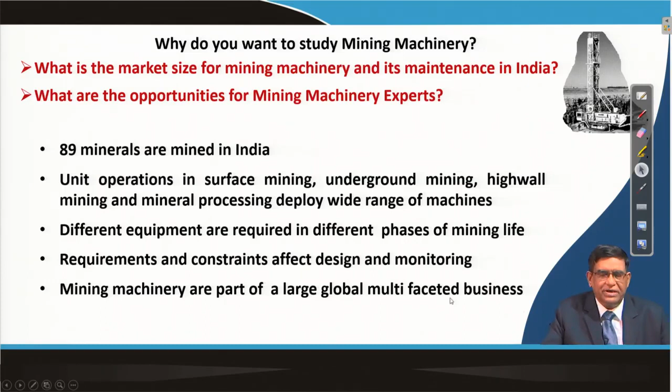So, these different machineries have been developed over the more than 200 years of mining history, and that is why mining machinery is a part of global business.

Though there will be a lot of wind power and solar power provisioning in India, dependence on thermal power will remain for some considerable years.

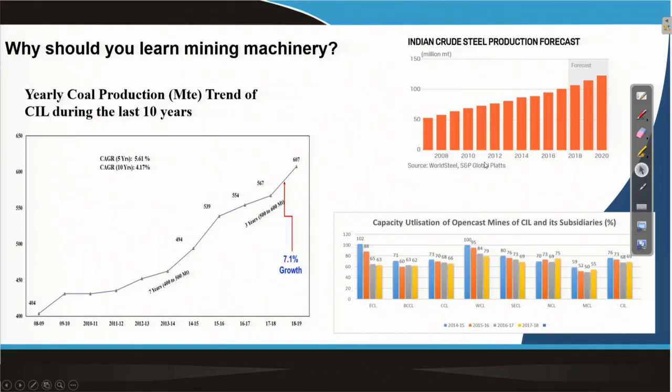So, there is a scope of deploying this machinery in a better way, and that is not only in coal. In steel also, there will be a lot of demand for iron ore, and India being a country with huge iron ore deposits, there will be a lot of mining machinery requirement.

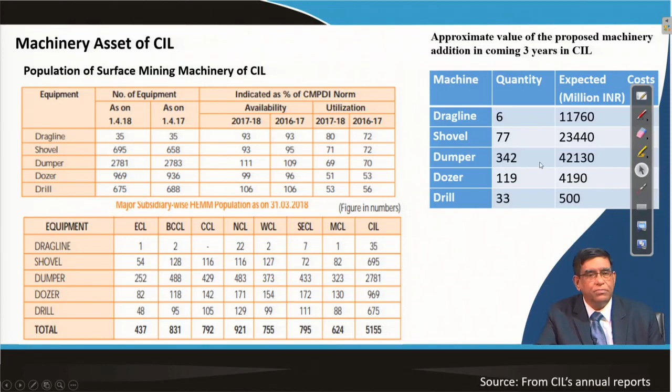If you see their number, it has increased over the years, and today there are more than 5,000 such machines, and you can see the type of investment in our country. Thousands of crores of rupees are being spent on mining machinery, and these machines' capacity utilization is also seen. Only in one subsidiary is there 79%.

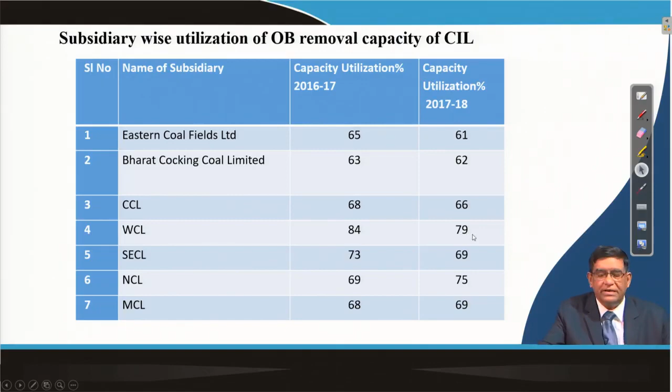That means what does it show? That means we will have to study mining machinery in a proper way, so that we can meet the gap. That is how our country can improve its productivity with safer and economic operations in the mines.

So, the whole mining machinery course will be giving you a lot of information about all this machinery, but after going through this particular class, introduction to mining machinery, you will be able to know the various types of mining machinery and classify them. Then you will know what machines are used for surface and subsurface operations, and you can draw the basic machine deployment chart, that is, for what operations how you will use machines.

Also you will be able to develop some broad selection criteria, that for which operation what type of machines will be selected, and also you will know what the characteristics of modern mining machinery are, if we want to study what changes are required in our existing machines. So, you will have to know the characteristics of machines and how the requirements will be specified.

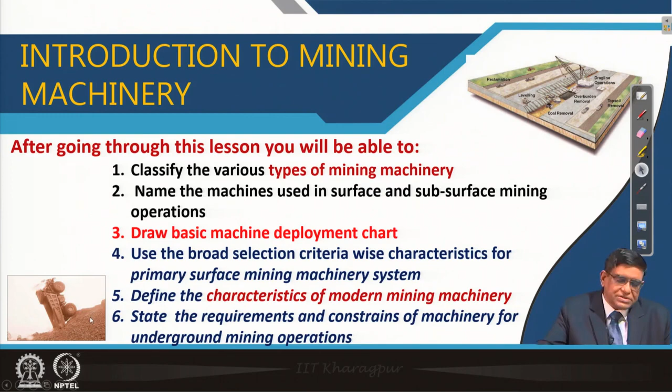So, this is surface mining, and while doing it, if you do not take safety into account, you can see in the other figure how a dumper can roll down while doing dumping operations. That means a lot of safety precautions will have to be followed. So, in this paper you will be learning about these things.

Now, coming to the classification of mining machinery, surface mining machinery and underground mining machinery are the two broad classifications. Surface mining means you are working under the sun, and underground mining means you are entering into the earth and then doing the mining operations. Besides these two operations, there is another one called highwall mining.

It is exactly underground mining from the surface, in the sense that after doing surface mining, when you reach the ultimate pit boundary, there are still some deposits, and those are excavated by a specific method called highwall mining. We will be studying later in this course what machines are used for highwall mining.

Then we get quarrying machinery. You know the stone quarries, the small quarries for taking roadstones and all; they are also mining operations. Smaller size machines are used there, those are quarrying machinery. And in every mine, other than the primary mining operations, there are some auxiliary operations related to construction work and civil work, so for that also you need a number of machines.

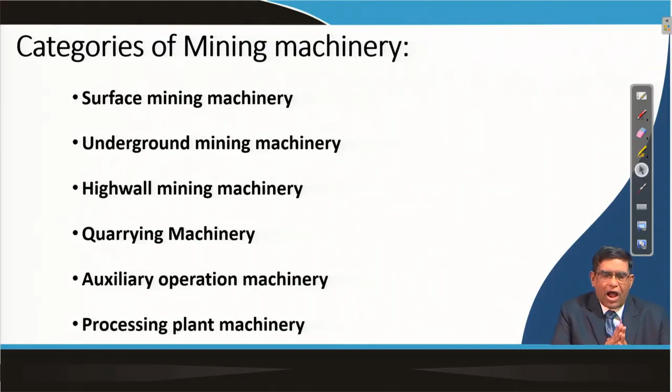So, there is a huge range of different types of machinery, but all machines are basically the same. You have got an operating unit, some functional unit, some power source, some control, and then you will have to operate these machines and maintain them so the machine is ready to work whenever you want. So, certain basic things are the same for all this machinery, but as a mining engineer you will have to know the specific purposes and how the machines will be selected.

Now, the operations in surface mining are done in different phases, and in each phase certain types of machines are needed. So, we have got the construction phase: you have found a deposit, you have got the lease from the government and permissions for mining, and then you need to start the mine. These locations may be in a forest or in a habitation area, so depending on that your construction phase jobs will be different.

Many of the operations involve clearing of the wood; if it is forest land, then you will have to do timber felling and stumping. You will have to develop a drainage network so that you can do your mining operations properly.

If there are some streams or rivers, you will have to divert them. Then topsoil excavation and storage. This is one of the very important environmental jobs, because the topsoil which is available there will have to be excavated separately and stored, because if the soil is lost once, you cannot get it again, because it takes millions of years to make a 1-inch layer of soil over the surface, because this is a process which takes place in geological time.

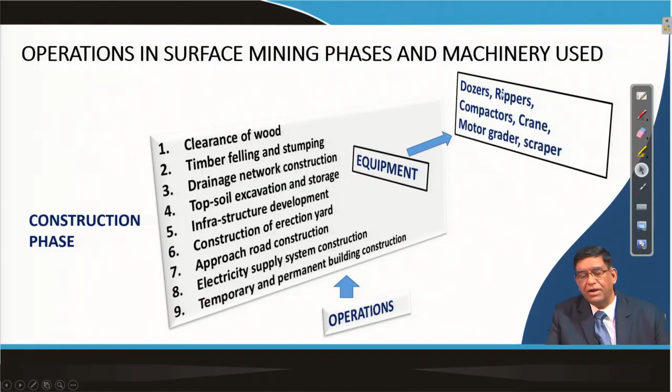So, all these things, from electricity supply system to your permanent and temporary building constructions, require certain machines, and those machines include your dozer, ripper, compactor, crane, motor grader, scrapers. We will be having a separate class for discussing all these machines and how they work.

Now, similarly, after construction has been done, you will have to do the preparation phase. In the preparation phase, basically you will have to remove the overburden. For removal of the overburden, you will have to do the drilling, blasting, excavation and loading. To remove the overburden hard rock, it depends. Sometimes it is a consolidated rock, sometimes it is semi-consolidated rock. They need to be fragmented so that they become loose to be excavated by an excavator. So, that is why you will have to use explosives to blast. Now, to put the explosives, you will have to drill the blast holes.

So, these operations of drilling, blasting, excavation and loading to a transporting machinery, and then that transport machinery will take it to the dump yard where it will be dumped, and then the dumped material will have to be leveled properly, so that proper housekeeping is done over those dump yards, and along with that you will have to make environmental protections. That is, if you are doing a hilltop mining area, then the whole water from there will be percolating down. So, you must see that proper rainwater harvesting facilities are created.

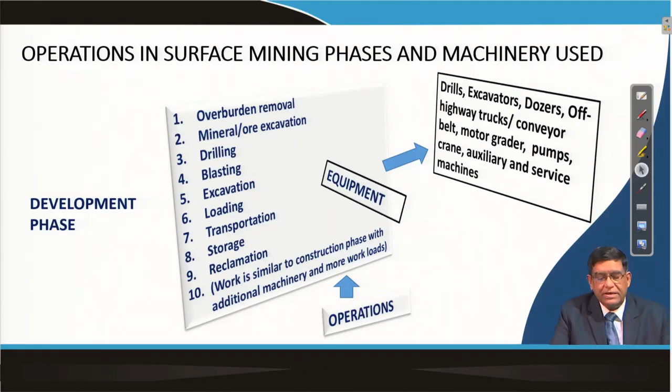Similarly, in the development phase also, the operations are similar. In that way, we are preparing the whole site so that the production for which the mine has been planned can be achieved. So, after the construction of the basic mine, you will be developing it, doing the same operations. So, you will be requiring the same set of machinery.

Then when your development is over, the mine is ready for producing the targeted output per year. That is called your exploitation phase or the main production phase. This word exploitation is very commonly used in the mining industry, but production is a better word. Exactly, we are producing, not exploiting nature, we are producing from nature, because we will again be taking care of nature. Earlier there were no proper environmental concerns, so people used to say exploitation, but the terminology is still valid.

But there also, in the development phase and the production phase, the equipment is the same, only the number of equipment will now be more, because now your mine is at full-fledged production. So, the production operations may be there at a number of places. So, a large fleet will be working. When the fleet size is more, you will have to take care of its maintenance, and see that there are no road accidents and all that.

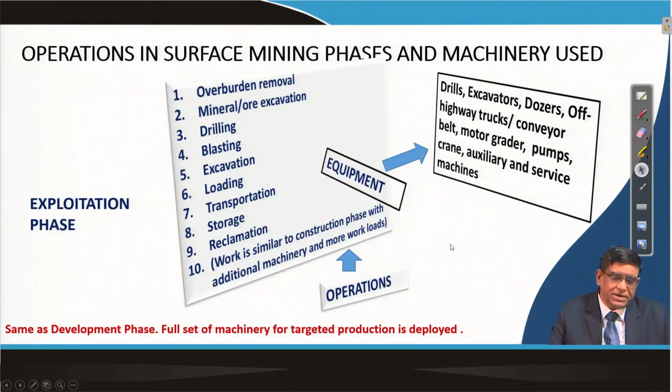That means at this phase your machinery will have to be managed properly. So mining machinery management in the mines is a main job in the production phase. Now, when the mine life is getting over, that is exactly when you say a mining operation ends. The preparation starts long before that, and then at some time the mining production will have to end. So this beginning and end, this is our mining life.

In this life, we have seen that initially there will not be production, then the production will start. After that there may be fluctuation, but then the production will come down, and sometimes there will not be any more production. But the mine life may go on because of your closing. Now, in this life cycle, when your production is closing down, at that time the reclamation phase starts.

When you started the mine, your deposit was lying over here. When you are excavating this deposit, this void is created, and a lot of overburden will be dumped over here. So you will have to fill it, plant trees, and then the nature will have to be returned. So in the mining reclamation phase, after the production is over, you will be preparing the site again. For that, a different type of equipment will be necessary.

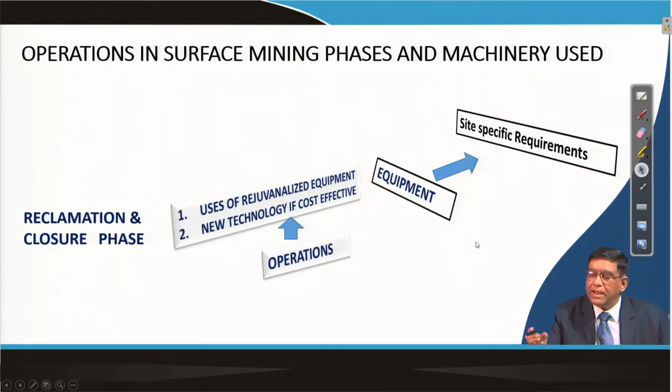Now, for drilling, you may have different types of drill rigs. We will be studying drilling machines separately, but you must know that there are different types of drills like percussive drill, rotary drill, top hammer drill, down-the-hole hammer drill. What are those machines used for, what are their purposes and how do they work? Similarly, for blasting, you will have to fill explosives into the hole, so for that you will have a mixer loader truck.

For the loading operations, different types of excavators may be used. For hauling, transporting the material, you can use a truck or conveyor belt. For crushing, you can use crushers; there are different types of crushers. For dust control in the mines, you may use a water sprinkler. So, as you are studying the other mining papers, you will have to find out what mining operations are done and what machineries are used in them.

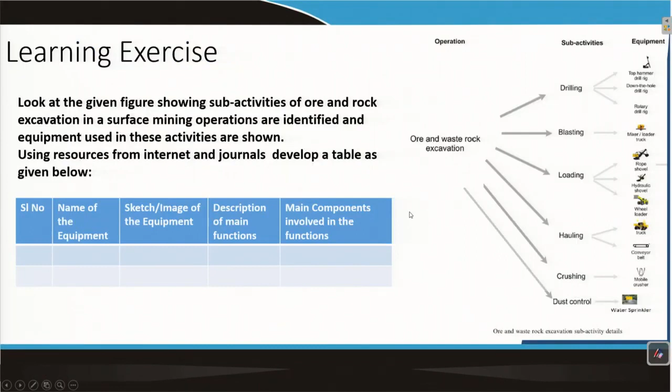After collecting this information, try to prepare a table like this: name of the equipment, draw some sketch or collect some figures for it, describe the main functions of that machine, and then the main components involved in that function. This is the way you will have to prepare a machinery deployment chart.

Your whole surface mining can be done in consolidated rock or unconsolidated rock. If you are working with consolidated rock, you will be mining with blasting, and in unconsolidated rock you can mine without blasting. To do the blasting, you will have drilling machines; there is quite a range of drilling machines that you will have to collect and study. Similarly, charging equipment will be used for the blast holes depending on the type of blasting you select.

Excavation and loading can be done by a single bucket excavator in cyclic operations, or in continuous operations with a multi bucket excavator. The single bucket excavator used with drilling and blasting may be a dragline type of machine, or it may be a shovel. The shovel can be an electric shovel or hydraulic shovel, depending on how it is powered, and there can be a wheel loader as a single bucket machine.

So, also these machines can give the material to a truck, and the truck will be taking it to the dispatch dump or destination, wherever it is to be. Now, this transportation job can be done by this truck, or it can be done by a conveyor belt system.

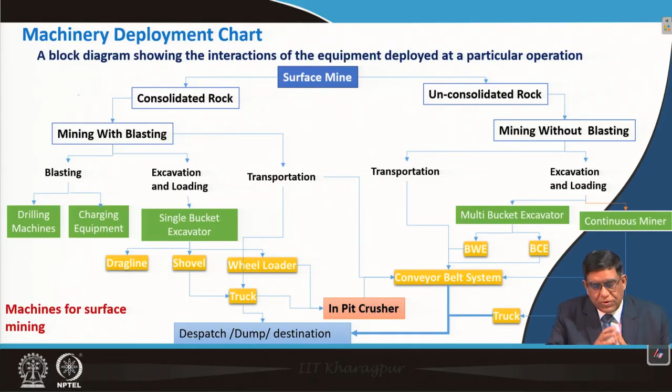This is a part. There are other new options and varieties. When we say it is a conveyor belt system, the conveyor belt itself has quite a range of different types. Those things we will be studying in this paper. So, that is why you will have to see how the machineries are deployed.

And as we said, there are different unit operations. Drilling and blasting is a unit operation of mining. Excavation and loading is a unit operation in mining, transportation is a unit operation in mining, and storage and dumping, that means the overburden or the unvaluable waste rocks will have to be dumped somewhere, and the valuable minerals like iron ore or coal will have to be stored, so that from there they can go to the end user.

So, different auxiliary equipment is also used as different operations are there. The machines required for these main unit operations will vary depending on how these operations are done. In surface mining, operations can be done in a cyclic, that is intermittent way, or semi-cyclic, or continuous. Continuous means the cutting and transporting operations are going on simultaneously without any time gap between them.

In cyclic, what is done? Drilling and blasting, wherever it is required, is never a continuous job. Drilling and blasting is a particular specific job. There you use the drills. A drill is the machine by which the drilling is done. So, similarly, excavation and loading and transportation can be done.

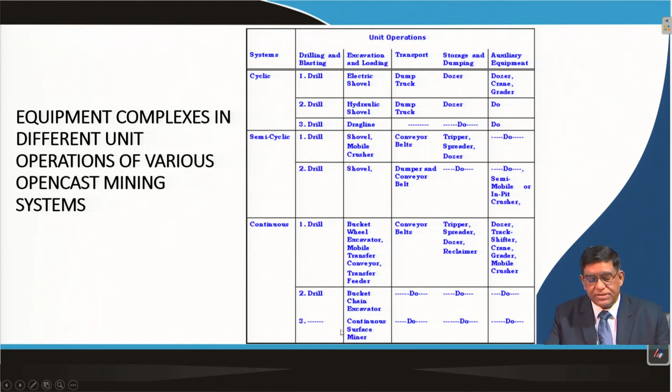So, here you can see the continuous mining is done by bucket wheel excavator, and there are other machines like mobile transfer conveyor and transfer feeder. Similarly, there could be bucket chain excavator and continuous surface miner; this machine is being used increasingly in our country.

So, for the broad selection criteria-wise characteristics of primary surface mining systems, the selection criteria are basically annual target, production rate, life of the mine, ultimate pit limit, deposit consolidation, associated site preparation, and system complexity. Now, if you use different machines, as I said, dragline, shovel, loader, bucket wheel excavator, you find that these types of tables are there, and you will have to collect and study them.

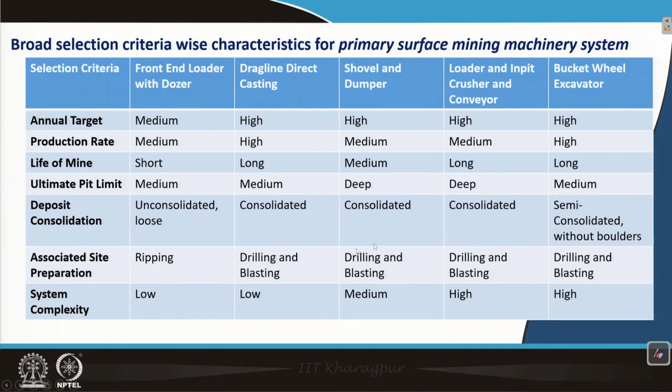Say if the ultimate pit limit is medium, then a front end loader can be used, but if it is for a deep pit, you will be using in-pit crusher and conveyor. Similarly, if the deposit is highly consolidated, you will have to use dragline or shovel dumper. So, depending on the criteria, you can select the machines.

For example, consider the capability of blending different grades of minerals. If the deposit has a variable grade, then a front end loader will give you a very good capacity to blend. You can mine wherever it is required and then mix to give good quality. But if you are using a bucket wheel excavator, selective mining cannot be done.

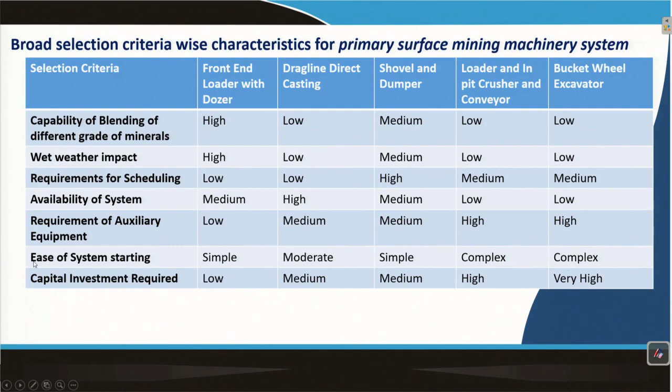Then there is the wet weather impact: front end loaders cannot work well in slushy and rainy seasons. Similarly, system availability: as you go to bucket wheel excavators and continuous systems, it is a complex system, so availability becomes low. Similarly, when there are more components and machines in the system, starting the system becomes complex.

So, the modern machines' characteristics are high installed power and modular design, that is, the machine comes in separate groups of units, and those groups are joined together, and if anything goes wrong, you take out that module and add another module. That is the way it can be done.

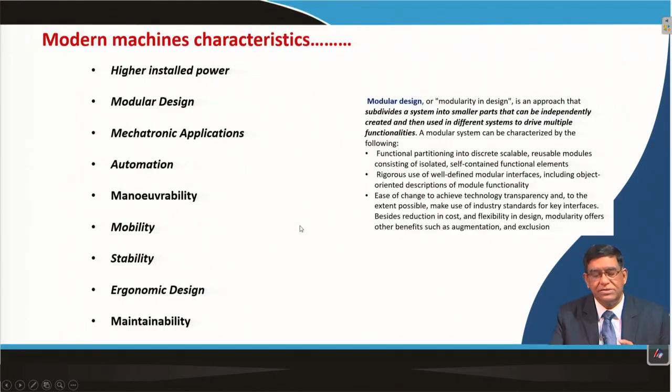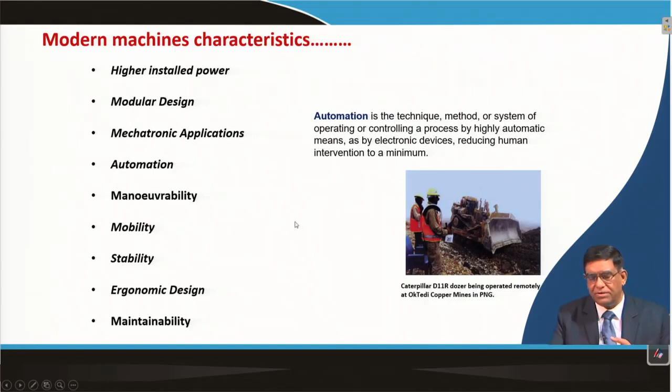And then mechatronic applications: new machines are coming with good sensors, and with that the whole control can be done. And there is automation, so many operations can be done without the operator nearby. Just like you can see here, a dozer is being operated remotely, a manless dozer. Nowadays you have automated trucks without a driver; you can see Rio Tinto has produced them. Then these machines must be maneuverable in short areas where there is difficulty.

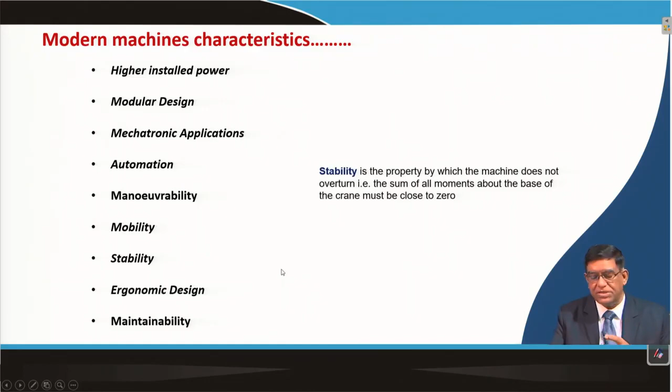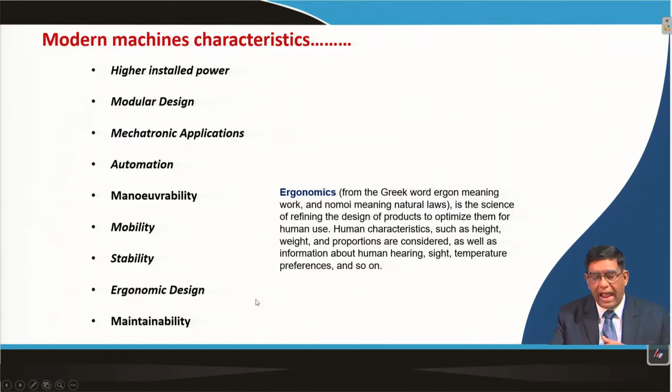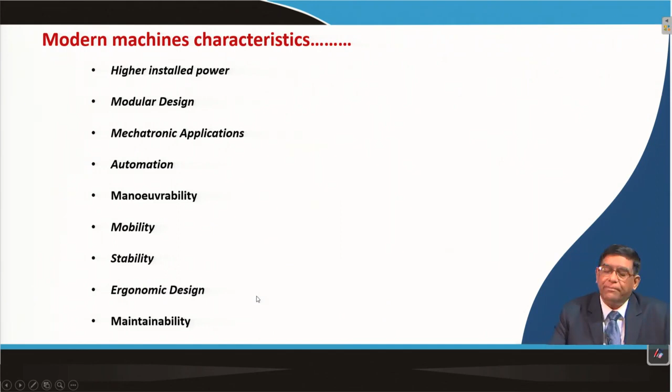Similarly, mobility of the machines, that is, the capacity to move within a defined degree of freedom. It will have to be stable, it should not get overturned, because it will be working in an undulated area. It should be ergonomic, comfortable for the operators, and the machine must be maintainable. That means if anything goes wrong, it should be brought back to normal operating conditions within a very short time.

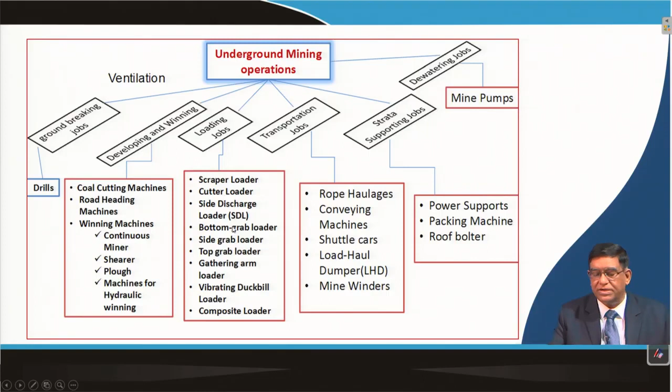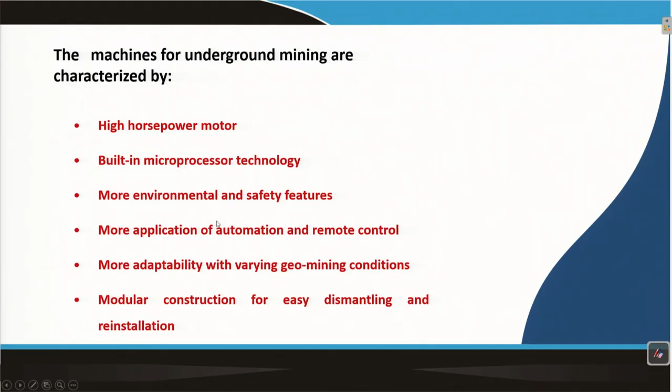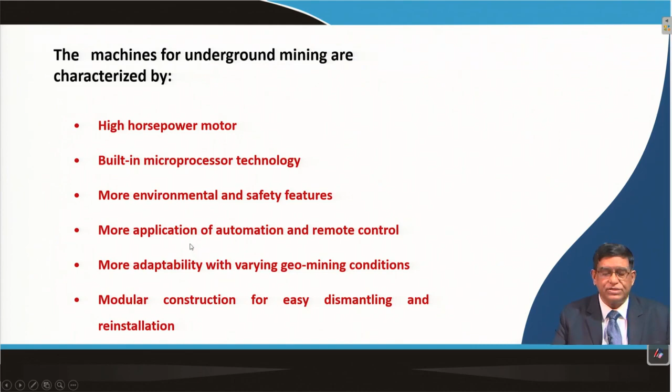Similarly, underground mining machineries are there for different operations like ground breaking, development and winning, loading, transportation, strata support, and dewatering, and for that a wide range of machineries are there. We will discuss underground mining machinery in our next class in detail. These machines will have to have high horsepower and work in a very robust manner. I will tell you how they work and their characteristics in our next class.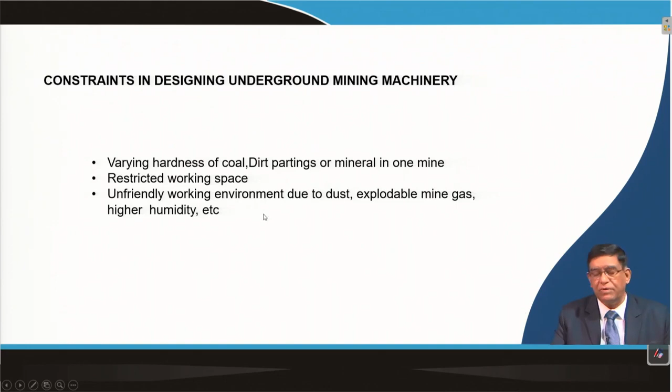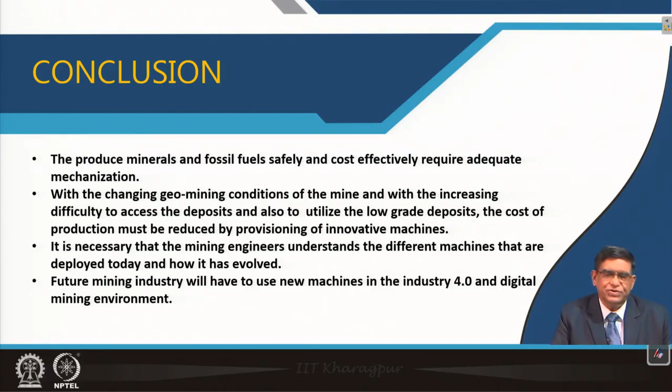So, they will have to fulfill a number of conditions, and these are some of the constraints in designing underground mining machinery, which have to be taken care of while studying mining machinery. To produce minerals and fossil fuels safely and cost effectively requires adequate mechanization, and with changing geo-mining conditions, increasing difficulty accessing deposits, and use of low grade deposits, the cost of production must be reduced by innovative machines. So there is huge scope for innovation, whether changing certain components or adding operational features.

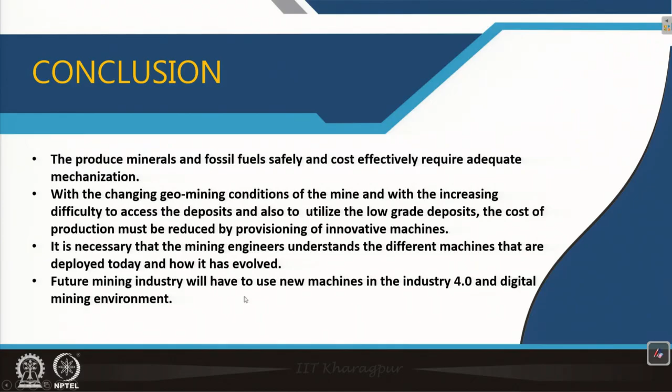So, it is necessary that mining engineers understand the different machines deployed today and how they have evolved. Their trend of development needs to be known, so that the future mining industry can use new machines in the Industry 4.0 and digital mining environment. How IoT is going to change things, how data analytics can help, how the machine parameters influencing performance are monitored, and what sensors will be put there so that overall control can be improved.

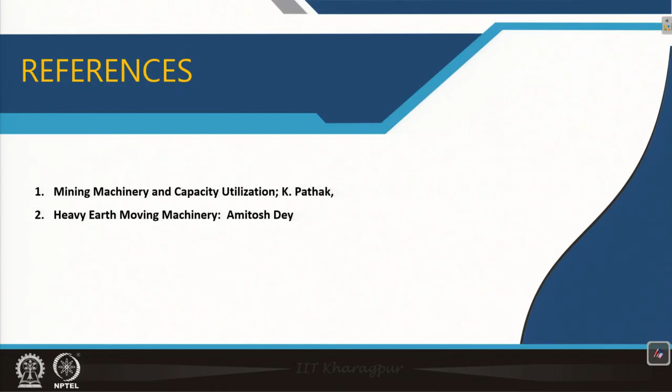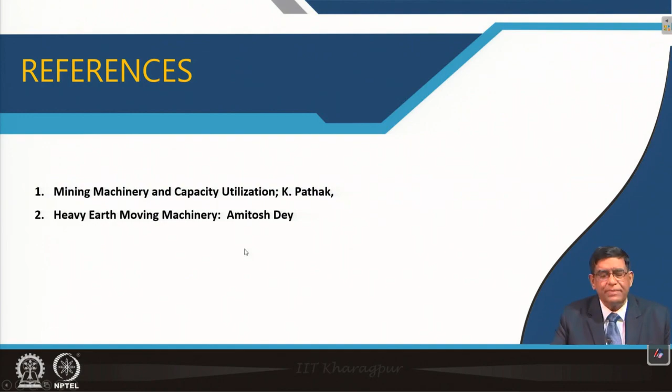So, you can study these books. There is Mining Machinery and Capacity Utilization, published by Cygnus. There is also a book called Heavy Earth Moving Machinery, published by Lovely Prakashan of Dhanbad, by Professor Amitosh, covering all the surface mining machinery, and other books like Moving the Earth by Nichols, which will also be very useful. But today you can get a lot of information about mining machinery on the internet, and there are open book libraries. I will tell you about those sources while discussing the individual machinery.